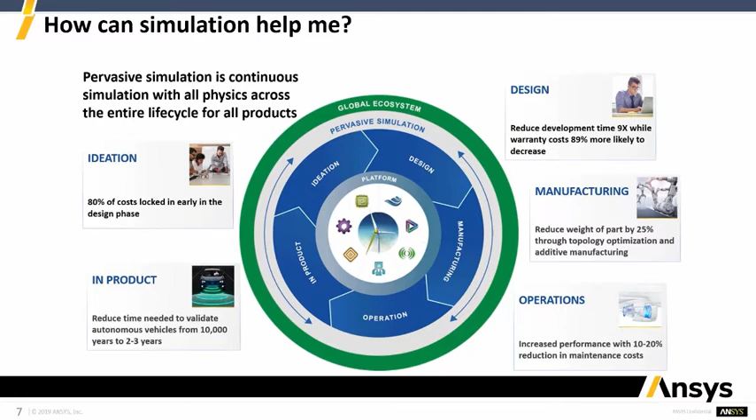So with that, I hope I've given you some useful background information on both EAC, Ansys, and what we can do. And this is where I will tag in my colleague Rod Scholl to start talking more specifically about Ansys Sherlock and what we have for you guys today. All right, terrific. Thanks, Vinny, for that introduction. Appreciate it.

It's always nice to start with a products overview slide. There's so many different products in the Ansys suite. In fact, so many that it's not even this product that we're looking at today. Sherlock isn't even populated on this slide, but it's in the electronics category, separate from structures and fluids. And of course, multi-physics is where Ansys has carved out a unique and dominant place in simulation tools.

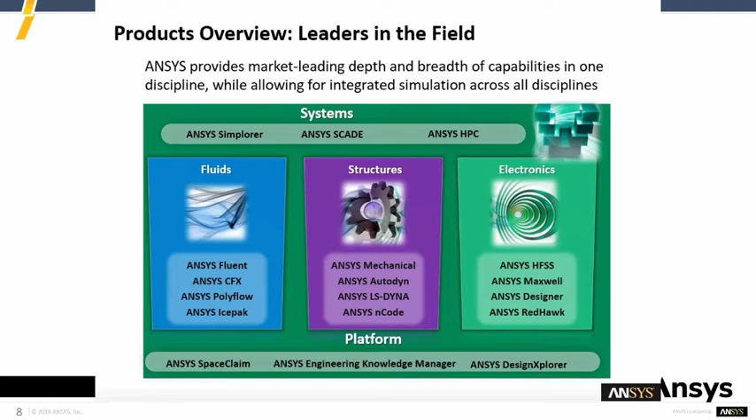So a lot of what we'll see today, we might touch on how it can be leveraged in a multi-physics environment, taking these results and bringing in or coupling them to other physics solutions. So I plan to walk through some slides on Sherlock, showing its use case, showing how it's used, a couple case studies, and then we'll boot up the software just to get a feel for the interface and what the workflow is like.

It's true with all designs that there's been a decades-long push from designing in the prototype stage to designing earlier in the design cycle, and simulation has facilitated that improvement and all the cost savings associated with it. PCB design has lagged behind to some extent, mainly due just to the expense of doing simulation, mechanical simulation and thermal simulation of printed wiring boards, just because of the many details of what it would take to get a decent simulation model.

So smeared property models were the standard for many years, and a lot of people are still either not doing analysis on their circuit cards, or they're just using a solid rectangular plate and using that to try to estimate reliability and performance under environmental loads. But it's been the cost, and essentially cost on the pre-processing side of building the models, which has slowed people down. And that's where Sherlock comes in.

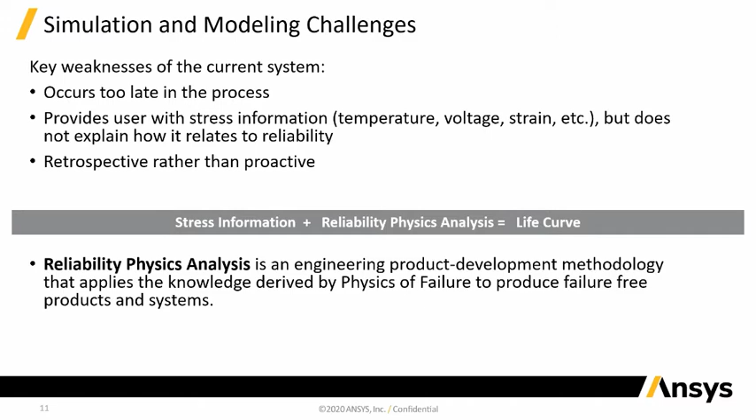And of course, what we're trying to do is eventually develop stress information, apply some reliability analysis, and come up with life prediction curves. That's the final output that one wants from a design perspective from Sherlock, is what's the percent failure over what time period for my design.

So we have enclosures, we have the printed circuit board assembly, and then combined into a system. A lot of people use Sherlock just at the printed circuit board level, but you can bring in enclosures and shells as well to have the stiffness of those components represented in the system.

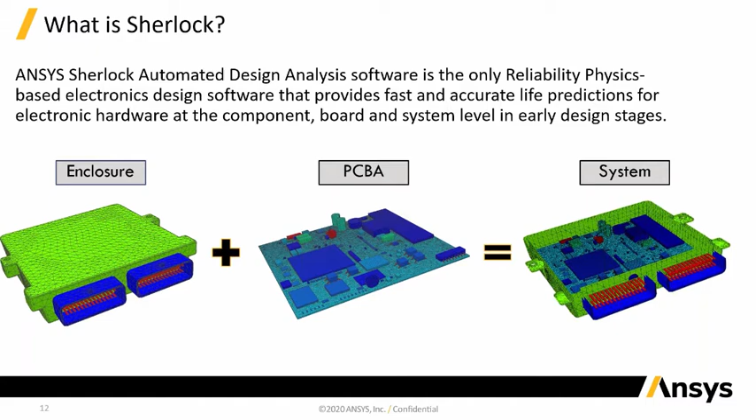This is a nice view of what I think is one of the most valuable output slides of Sherlock, and we'll take a second to appreciate it. Down here on the bottom, we have lifetime in years. Up on the top, we have probability of failure. And this gray bounding box is specified by the user for how they want a component to perform. So in this case, we want to have less than 10% probability of failure over a 10-year life.

And each of the curves represents different applied loads to the system. So the green one is plated through hole fatigue loading due to thermal cycling. The blue one is solder fatigue. Then there's vibration fatigue up in purple, and all the individual loads combined into a single overall combined risk. So you can do just a single analysis, but as you get further in the design cycle, or as your company has more well-defined environmental conditions, you can add those all in together.

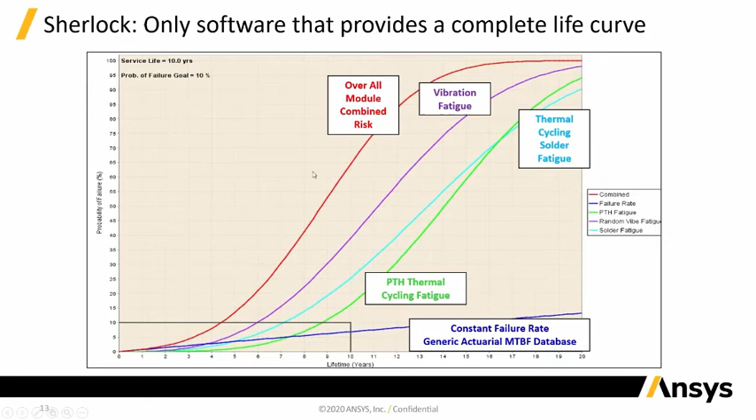So the power of Sherlock is really throughout it, but for me, I'm most impressed by its pre-processing capabilities. If you could generate this solid model quickly, then you might be able to achieve these same analyses in Ansys. It, of course, wouldn't be as automated because Ansys is more of a general tool. And by Ansys, I mean Workbench Mechanical or Classic Interface or Discovery AIM series.

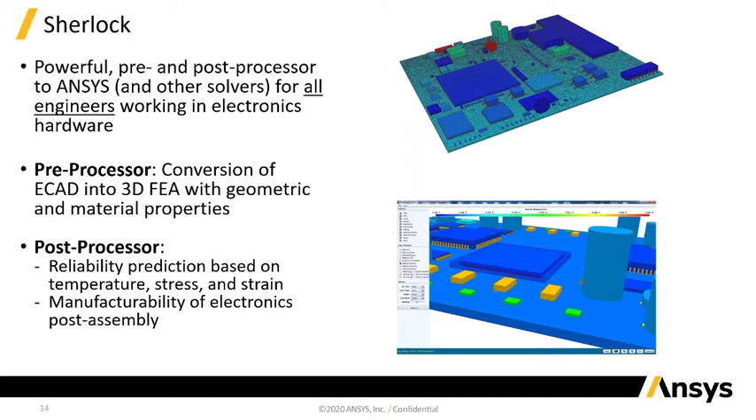But populating this image up on the right, creating that image from the information coming from electronics design, is where the expense of simulation has historically come from. And that's the pain point Sherlock set out to remove. But of course, it also automates the analysis and does report generation and easy post-processing. So all that's included in one interface.

The way this is achieved is through an extensive part library. I've heard the number 300,000 individual components, not including packages. I'm not sure the number of those, but a ton of those as well. So because the naming conventions in the electronics world are relatively standardized, Sherlock is able to read the ECAD files, the pick and place parts list or the bill of materials, and index a database to populate those components onto the board, including their placements.

You can work with your own library if something is missing. You can keep a local library of components, but it's pretty surprising how successful just the first import is. Of course, you have to go through each part and make sure it's what you want, because some of the entries are labeled as guess, for example. So it recognizes the package or the package thickness. It's using a default ratio. If you have that information for a component you use a lot, you might switch it from guess to the actual thickness. And the origin of all the data is tracked here and color coded off to the right.

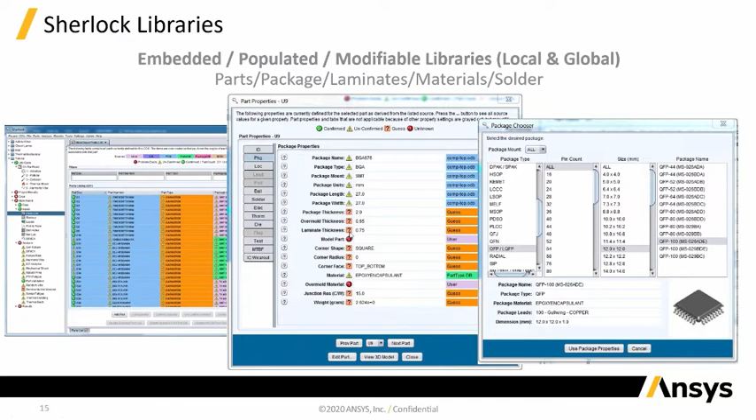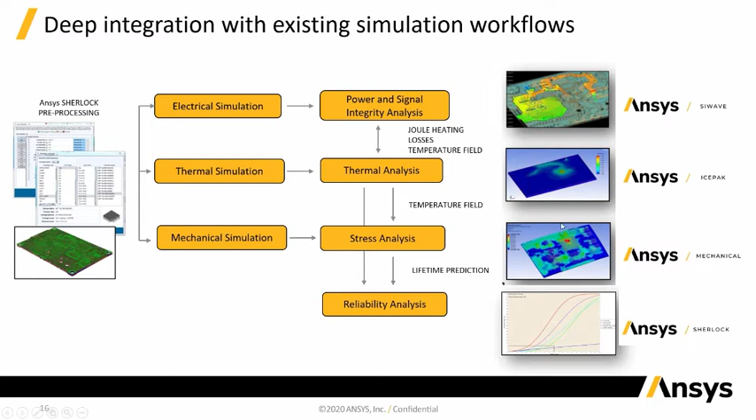This one takes a minute to stare at, but I think it's worth, again, just seeing where the tool would be used in your design process. You're going to start here with the input data after the electronic design is first done. It's going to parse through the Sherlock library to create a design and analysis. So bring that over into pre-processing. You can include life cycle conditions.

If you wanted to, you can bring it over to the Ansys suite and do more complex thermal, vibrational, and shock analyses, nonlinear analyses, or anything that's particular to your design. And of course, you can bring things back in on post-processing from any of these complex analyses, bring in the strains and the displacements, temperatures, and use the Sherlock reliability physics for reliability predictions.

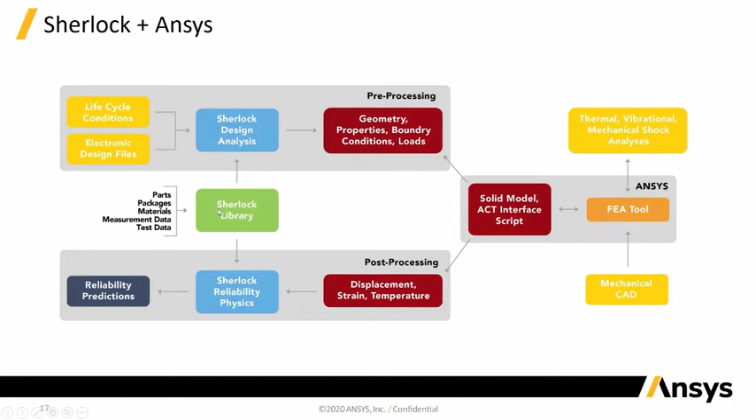So when it comes to reliability for solder models and other electronic joints, there's been a slow-moving technological history of how to calculate that. And it starts back around Steinberg, I think that's in the 50s, and Darveaux models into Engelmaier. And Engelmaier was sort of the latest and greatest, which uses a strain range, so Coffin-Manson type fatigue curves and an allowable strain for each of the locations on the board.

Blattau, if I'm saying that right, switched that over to a strain energy method, and that's what Sherlock uses. So there's some papers showing how successful that has been, but the point is it's using the latest technology to take the predicted strains at all these board locations and come up with predicted fatigue lives for all these different types of connections. So that's a little bit of theory going on behind the scenes. Obviously, if you want to dig into that and that's important to you, we can have a more technical discussion.

So we see how it fits into our design process, but what exactly can it do is the question. So solder fatigue at the board level or system level, it can predict natural frequencies. You can apply mechanical shocks, random vibration, your PSD, harmonic vibration, doing the plated through hole fatigues. CAF is like a migrating, substrate materials like copper migrating during an electric field, a sort of advanced analysis, but it's been implemented. Heat sink modeling, wear outs of capacitors, especially if you have that data, of course, from the manufacturer.

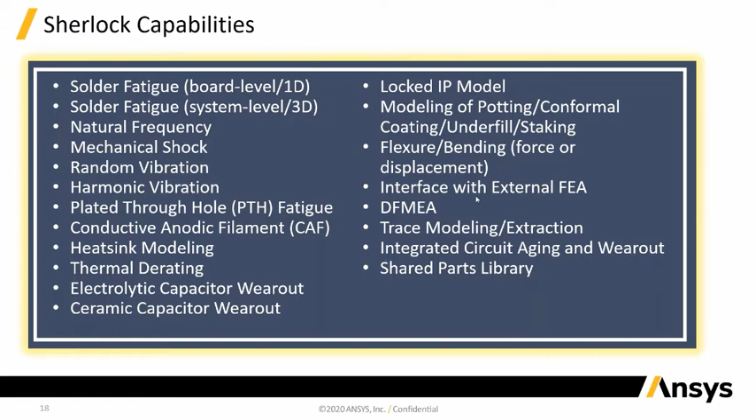So when to use it within the design process, you start with your hardware specs from the customer, build a functional block and have to make decisions on the housing and the connectors, come up with an actual board. The more you use Sherlock, the more it'll be involved in your initial part selection, because its parts library will show you the different types of attachments and joints. You'll begin to get a feel for which parts have superior fatigue lives the more you work with them. And then, of course, initial part placement.

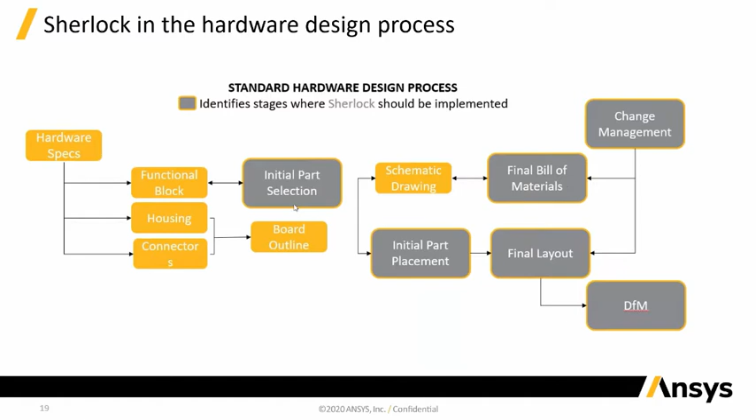In a typical design process, you get one or two guesses at that. And Sherlock makes it so you get many guesses quite inexpensively. And of course, part placement is huge for any of the mechanical shocks or vibration cases. It can also matter for thermal as well if you have some high temperature chips. And then developing a final layout, producing the bill of materials. There's a brief slide on the locked IP model. If that's of interest to you, we can give more details to you of what can be hidden and what those input outputs look like.

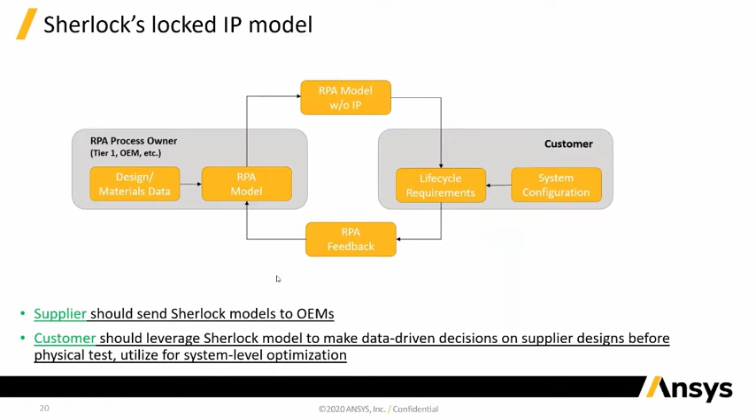So many times, this might be redundant at this point, but I still like the slide. I always think of electrical circuit design, and since I'm a mechanical engineer, I think of that as somebody else's territory and somebody else's problem. Once in a while, when we have to include it, as we mentioned before, I've used smeared properties on a rectangular board and not really know the actual stiffening effects of the installed components. But that's no longer the case with Sherlock. If you're in charge of the mechanical reliability or electronic reliability of the product, I think Sherlock is the tool that you would use.

If you're involved in the testing, a lot of the cost savings that we see are done on the test side, scrap rates, the cost of building tests. If you can show some tests aren't marginal, then you don't even have to perform them. You don't have to build certain fixtures. People can save millions just on the testing side.

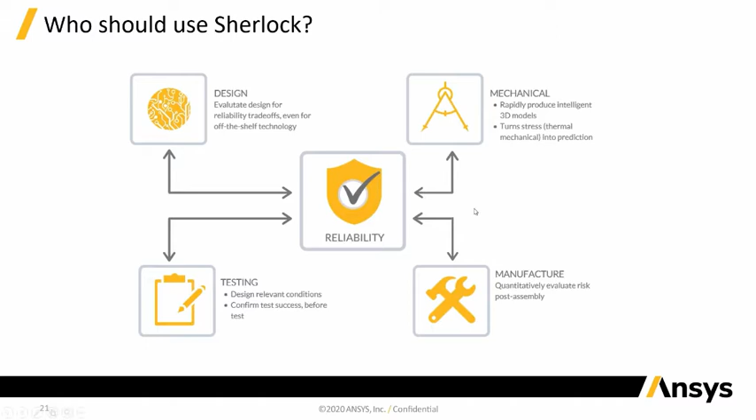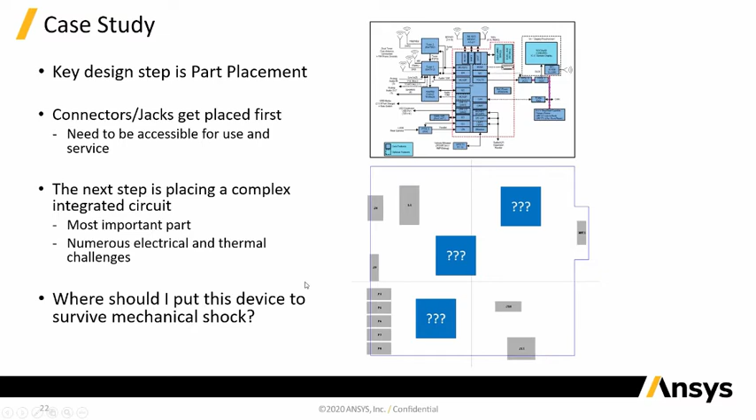So if you're new to electronic board design, I mentioned already how part placement is important, and it's sort of a competing issue between the traces and the power generation, heat dissipation, and then the mechanical requirements. Generally trying to avoid placing things in the very center of the board, which is often the flexure points, unless you have some posts located there. But for surviving mechanical shock, where should we place the IC chips?

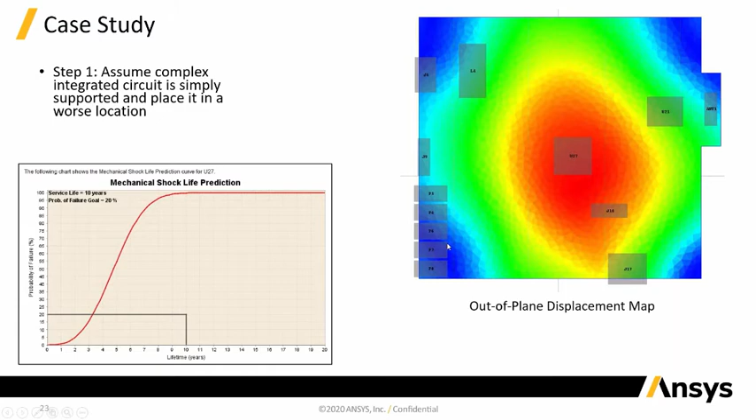By sliding the chip to the left to another location on the board, you can see dramatic improvement in the life of the product. Similarly, on this one, they've changed the support locations, changing the profile of the displacement and leaving U27 in its original place, and that has an even better effect on improving life. So in this case, they also changed the potting underneath U27.

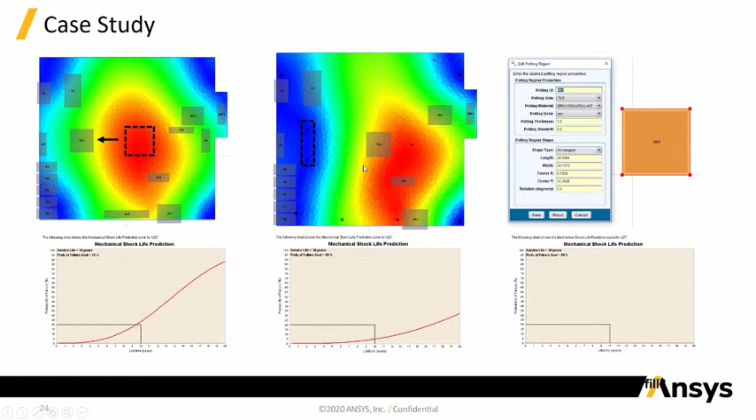So the build times, as I said from the beginning, changed from 2 weeks to 45 minutes. I think your first time through it might take 2 or 3 hours because of familiarity with your individual components. But as you become more familiar, I think 45 minutes is too long. It just doesn't take that long to import models that come in right away. And you just have to review, depending on how many chips or components are on your board. It always makes sense to review them to familiarize yourself with them.

So this is a nice tool to combine with your Icepak and your SIwave for your mechanical, because it does that pre-processing for you. And in the end, we're saving costs by reducing warranty returns in the field. If this tool interests you and we have to justify the cost of maintenance and purchase, looking at warranty costs on returns from electronic failures, those add up very quickly. So it's an easy place to sometimes find the ROI, as well as testing costs, which I already mentioned.

And then just in terms of design cycle improvement, it takes the design process from months down to weeks or even days if it looks good out of the box. It can verify that. And sometimes time to market is what's most important in electronic fields these days.

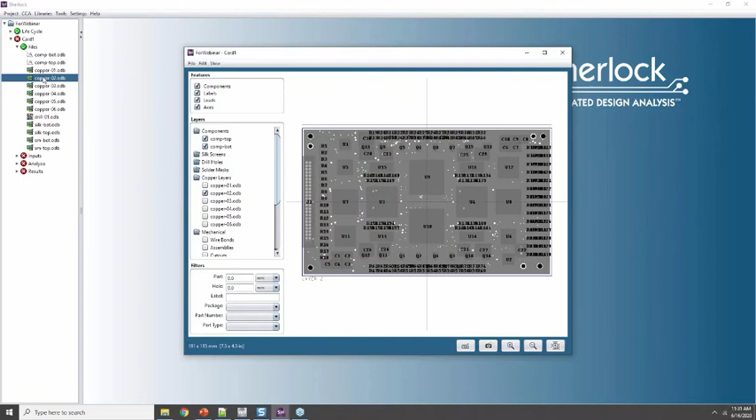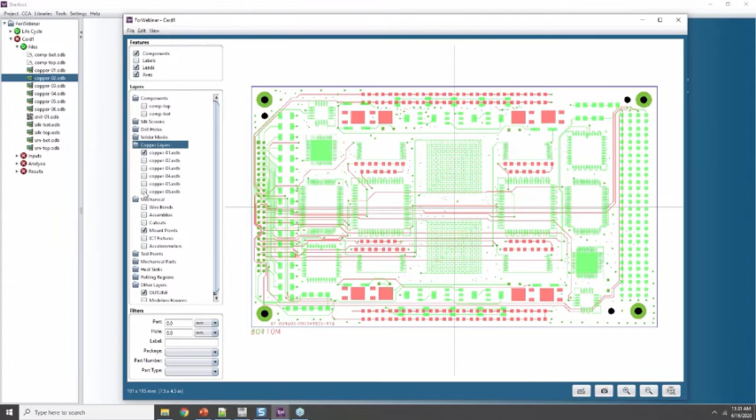So on the input files, one of the nice things to do is let's just look at a copper layer. So I've double clicked it to bring up the layer viewer, and I'm going to toggle off some components, and we can see the copper trace that was present in the ECAD. And actually we can see all of them if we want. Remove the power ones there, but top and bottom, and we'll just look at the top for now. So here's the top copper layer and traces that are present.

Now let's come down here to inputs where all these files have been brought in. Let's look at the stack up. What the stack up has done is gone through those individual layers and laminates and come up with aggregate material properties automatically. It's assessed the volume of copper, and it's adjusted the CTEs automatically and the densities. So this essentially composite material now has 11 layers in it with the different copper contents and laminate contents. And of course, if you wanted to adjust these for a particular design, you could as an improvement or as a design change.

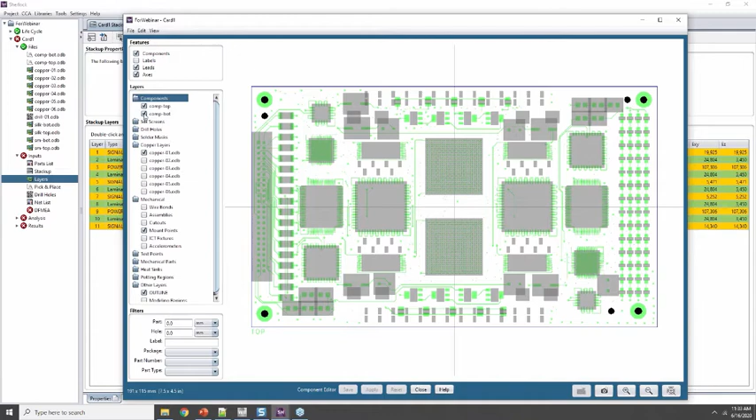If we go to the layers, go back as well. You probably won't do much editing here in this. You might do editing on the ECAD side, but the kind of editing you might do would be to change part location or orientation. So if I go to edit components, get rid of the bottom, and I can even get rid of the copper. We'll turn off the labels just for fun. And so I can pretty easily move things around on the board. Obviously, there's no room for this one. So let's cancel that.

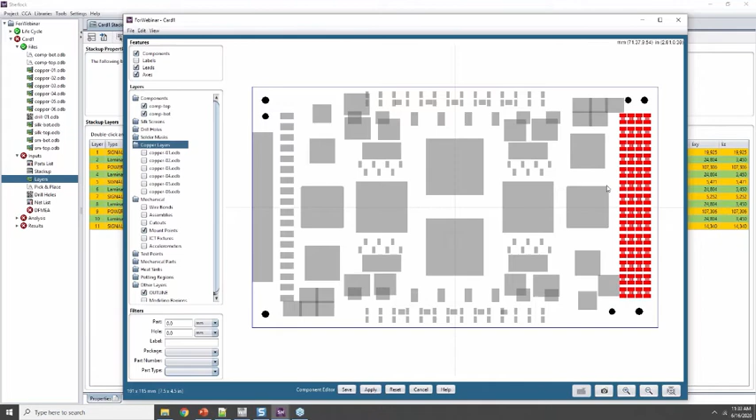But if I want to rotate a bunch of resistors, oh, missed. Resistors sometimes don't come in with the correct orientations. Most things come in with the right orientations, but there's an inconsistency within the standard for them. We can see I can move through holes around, the mount points around if we wanted to, or change their size. But you can see it's pretty easy to make minor changes on this board to do design changes. I think at that point you would then send it back to ECAD and they could update the traces for the design that you determined would have acceptable reliability.

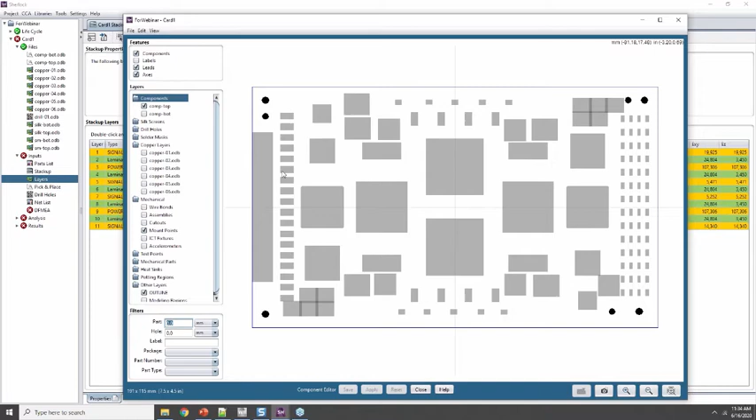Now the other big component here, we've talked about the board coming in and the component positions. Let's talk about the components themselves. And so I've gone over here to parts list. This is not that big of a board. This is a couple hundred, maybe 100 components on it. The color coding here is important. It tells you the origin of the information, where it's brought it in from the ECAD files, and a lot of them are orange and are therefore a guess. The package DB file brought in some of the package names, part numbers came in probably from the bill of materials.

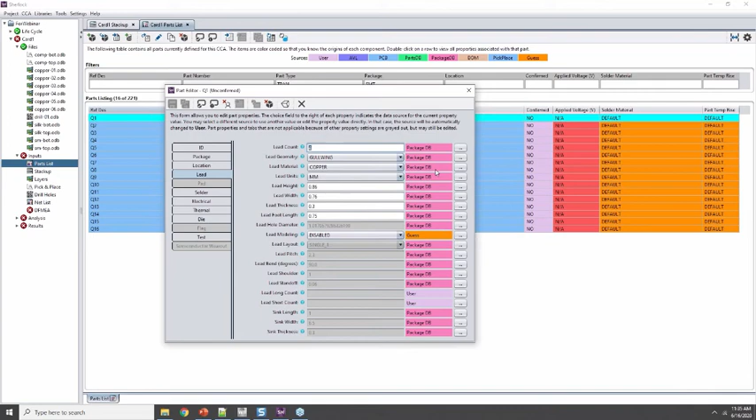This parts list you're going to spend some time working with, and so it has some features, such as filters, and you can edit properties within it. You can edit individual properties. For example, you might come in and change the solder material. You might change the solder thickness. Of course, you could manually edit location if you wanted to. The definition of the leads, the different lead geometries that come standard, those were defined in the package DB. And there's also the ability to modify multiple parts together so that it's not a manual process. So just want to point out, you have a fully featured interface to work with your parts individually and edit them and make changes as required.

Now this parts list, I'm going to right click here and go to update parts list from part library. Now you have a local library and the Sherlock library. So I'll just use part numbers here. This is going out to the Sherlock library, the 300,000 plus components, which is being updated with different manufacturers and data. And you can see a lot of these fields have turned green, meaning that it has found those components and populated more information within each individual component.

So that's the creation of the components. And first time through, you might just click solve without even messing with the parts list, just to see what you're working with. And as you work with the model, you would add accuracy. So you have component definition, you have the board layer definitions, and their placement.

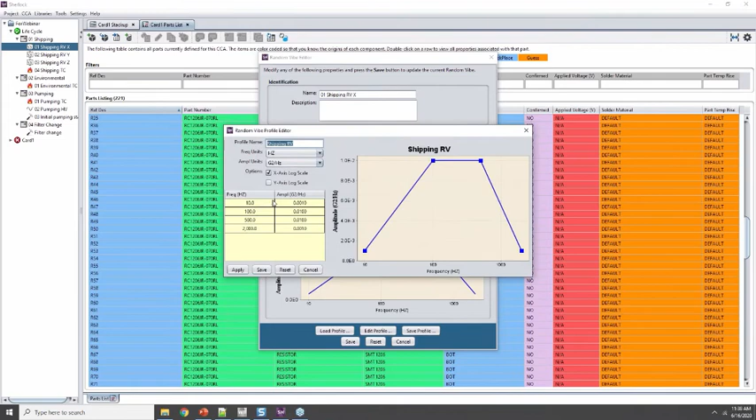So within the shipping load, we have an XYZ direction. You can see this is PSD, this is random vibration in G squared per hertz, and comes in with a file. You can edit this profile, tabular edits, temperature, operating temperatures, uniform operating temperatures, the environment cycles going up and down. This has only one load case in it, but you might have multiple starts and stops and long dwells.

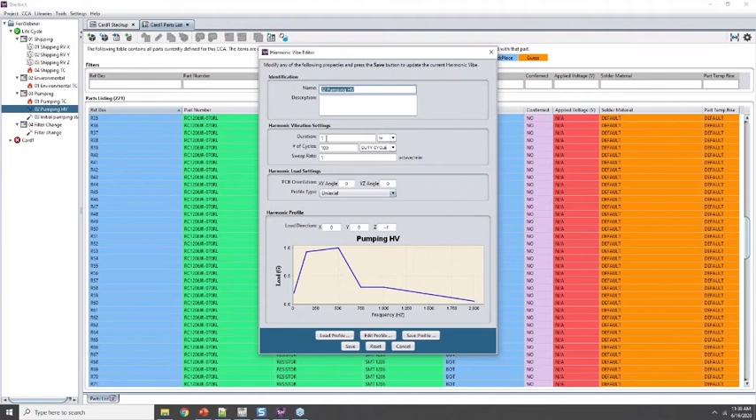Pumping, this was on a mechanical part that actually had a known G loading profile. So essentially a shock profile, and this one's going to repeat, 100 cycles per hour. So this is where you would put in duty cycles, mechanical duty cycles. Now you might have some shocks. I guess there aren't any shocks defined here as well. This filter change looks like it is a time history transient. So you can see the options for editing those individual environmental events.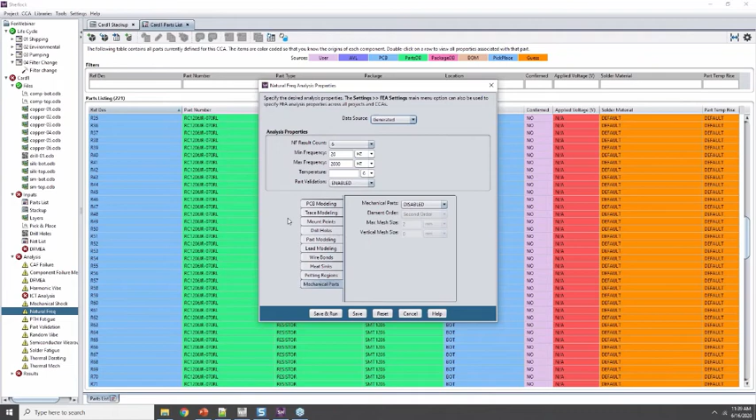So with those defined, we have the board and we have the inputs. Let's show you what the analysis looks like and how quick it is. The longest one is natural frequency. So I'm going to kick it off now and say edit properties. It brings up some questions like how many modes do I want over what frequency range. I'm just going to accept everything and say save and run. You can see this little clock going down here.

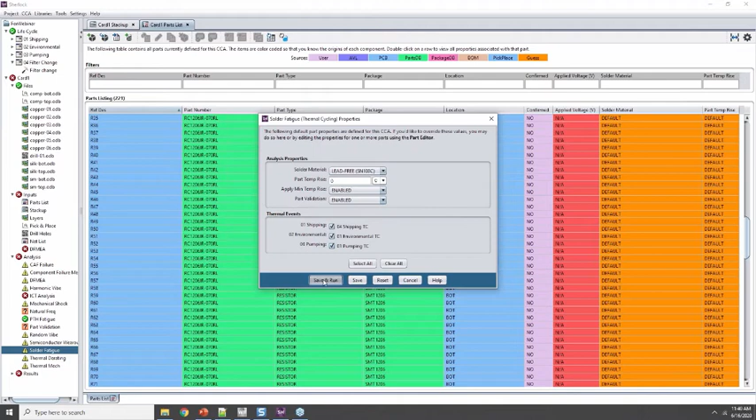We'll do some plated through-hole fatigue. Let's add all three environmental loads. We'll run fatigue on that. And let's do solder fatigue. And right now it's using this, let's use SN100C, and we'll run all three conditions. So plated through-hole fatigue is done. Actually, it looks like the others are done as well.

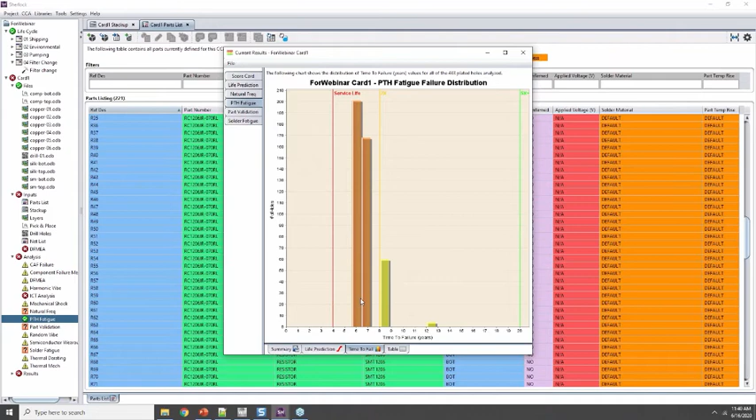If we look at the results, we have all sorts of problems with plated through-hole fatigue. Everything is red. If we go to life prediction, we are not meeting life. Time to fail, we can see there's quite a few components, or sorry, holes, because it's the plated through hole. Quite a few holes which are failing the fatigue criteria. And in a tabular view, we can look and see which of those are the worst.

In this particular analysis, I just did this earlier, so I know this is all coming from the pumping, I believe. So if we turn that off, now we can see, oh, the life isn't much better, but all the components are passing the plated through-hole requirements, but it's still marginal, or still yellow. All right, so greater than 40 years, so that's enough.

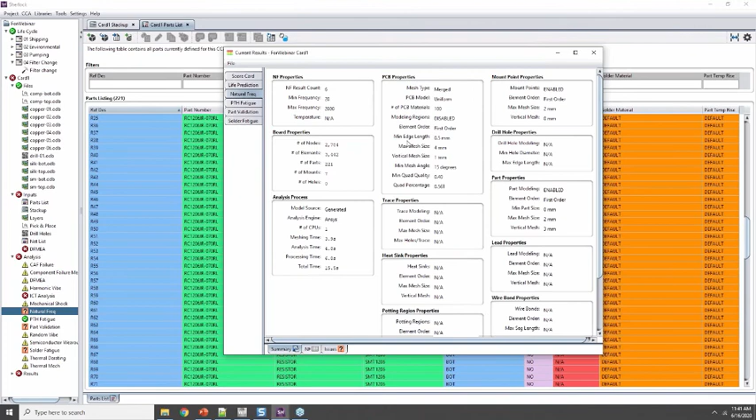Let's look at the natural frequencies. There's a summary. If we want to actually view the natural frequencies, this pulls up a viewer, so there's a second for this license to check out. Now, when we submitted the natural frequency analysis, by default, it's submitting an Ansys job in the background. So it's created the file, it's run Ansys, it's solved it, it's brought those results back in. So you can match Sherlock to different solvers, but in this case, we're using Ansys.

And right now we can look at the individual mode shapes on the board. It's nice to see the parts populated on there as well.

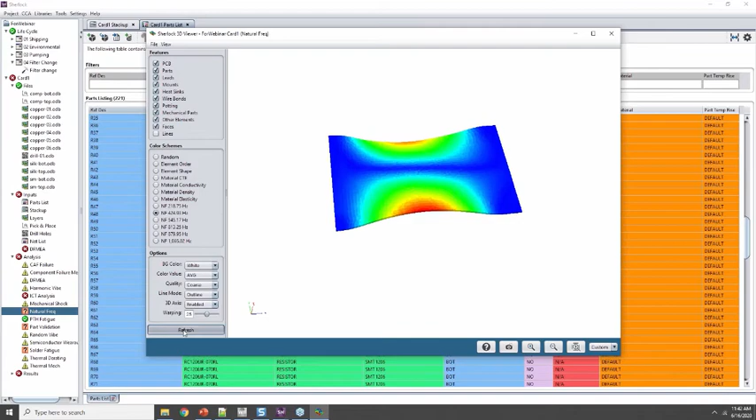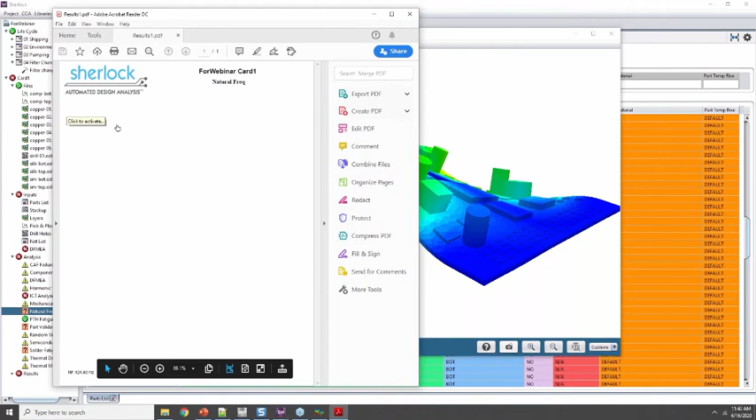For visualizing where components might need to move and where high strains are. You can export these types of results into PDF, for example, for sharing with the team. This is just kind of a nice feature of PDF that you can now rotate PDF, have dynamic, oops, that's not that one. So if you want to share information easily, PDF is a nice way to do it.

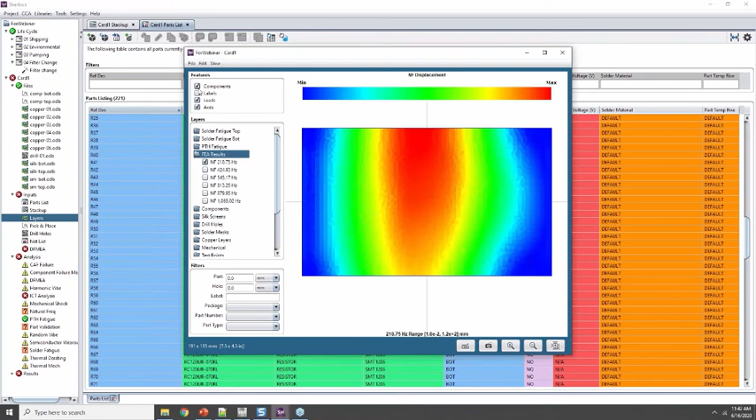So although these are nice 3D pictures, it's worth showing that within our layers tool, because I've done this analysis, the FEA results are in there as well. And let me add in the components. And so that's maybe it. You know, the 3D view is nice, but this maybe is more typical usage to see how your deflections map onto your individual components.

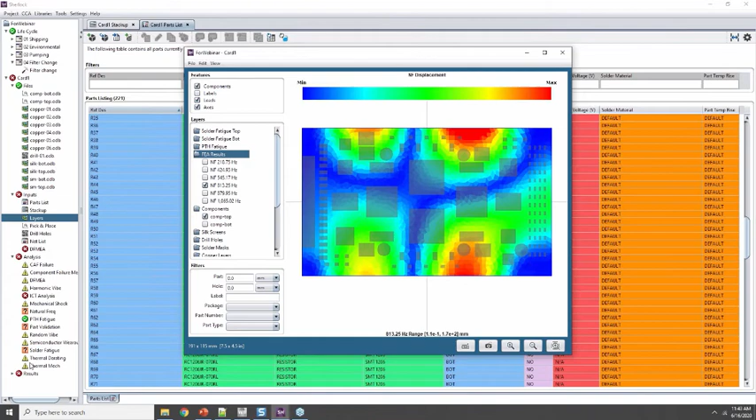Let's go down to solder fatigue again and view those results. So solder fatigue did not match currently. If we look at the table, what are we looking at? A lot of these have a life of around 3 years. U1 and U2 seem to be the worst. So a typical design process might be, you probably have to change a bunch of them. So maybe you would select U1, U2, and all these resistors.

Go back to your parts list. And for U1, U2, we would change perhaps the solder to a defined higher grade material. And then we can go back and rerun the analysis. So it's using the same defaults for everything else, but since we've specified the solder material for U1 and U2, now we can see U1 and U2 have increased their life. They're up to 9.43 years just by changing the solder material.

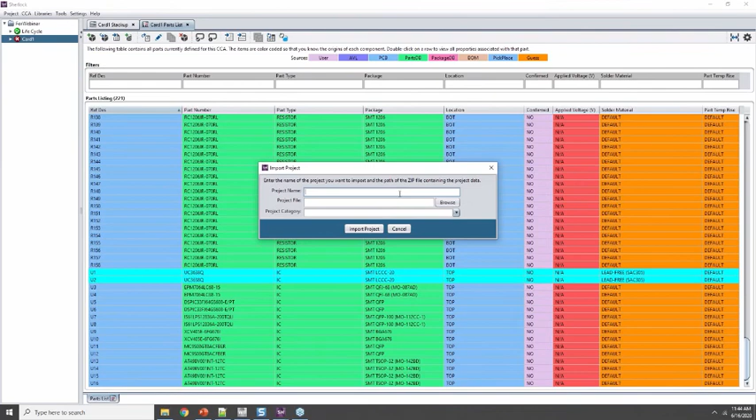It might be worth it to go back and change the solder material for these resistors, or obviously there's a lot of other design changes one could make. So that's what I wanted to show you there. Let me import a fully solved project here

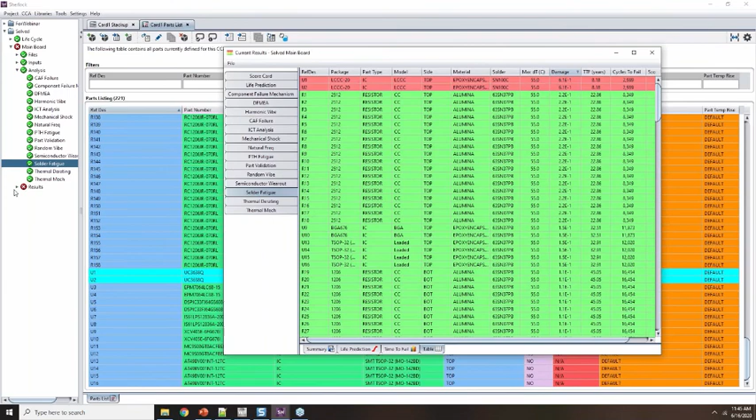and talk about project reporting, because that's sometimes the least pleasant part of our jobs is making the report. You'll notice this analysis has green check marks. They've done every type of analysis on this particular component. So under report, we can generate a CCA report, tell it what we want to see, and I'm going to say everything. This will take a minute to pull up.

But in terms of cost savings, a lot of times it's not even cost savings in documentation because people just don't document because it's too difficult. So it's not just a cost savings in this case. I'm gonna have that opened up. I thought I had that closed. Here's the report.

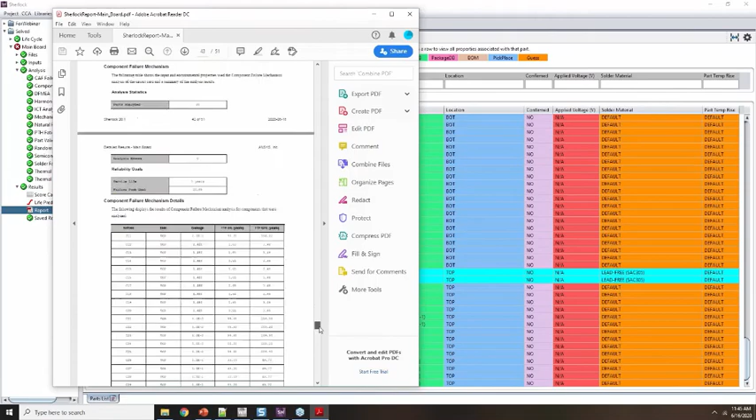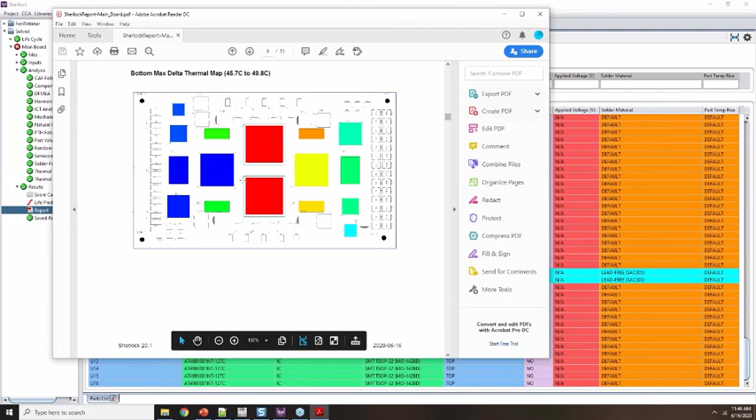And this automation saves countless hours and allows a report where we can add in a few paragraphs later to describe observations, conclusions, and desired changes. So this type of analysis, turnkey type of analysis, really lends itself to report writing. And so this is a terrific feature.

So everything we've talked about so far shows life cycles and inputs of just environmental temperatures and shocks. But one of the big things that we become concerned with on some boards is thermal profiles during operation. You can go through and assign temperatures to individual components, but many times that isn't known. One way to do this is to add a thermal image file.

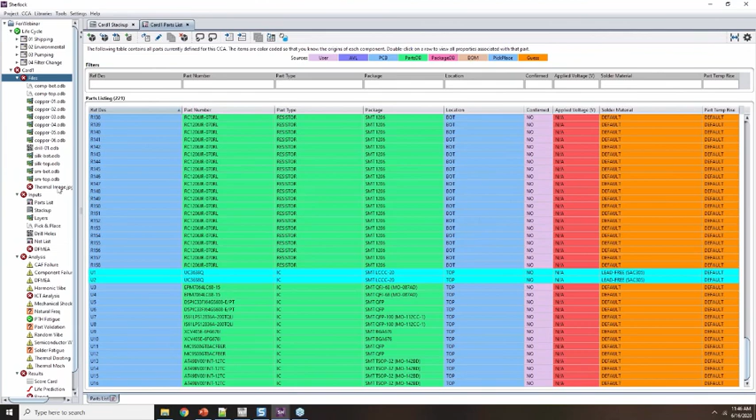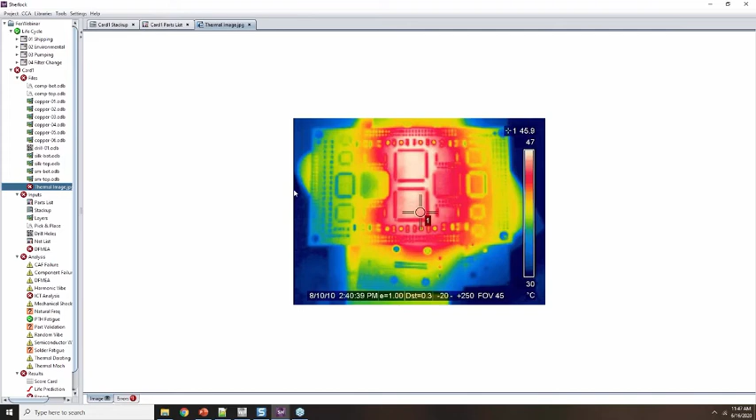So I'm importing a thermal image. Let's view the file. This was done with a thermal camera on this particular board, which we can now use that thermal image as an input. So this is a thermal map as an image. Let's move out of the way. Minimum temperature is 30, maximum is 47.

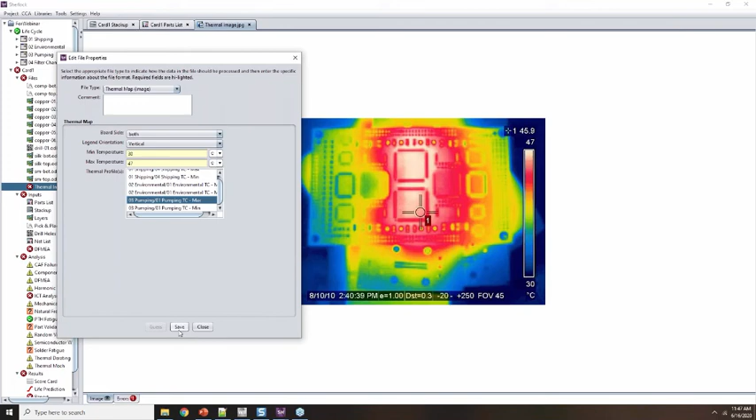So I'm doing this with a thermal camera image, but you can imagine you could do this with an FEA image from a supplier, or you can of course read thermal results from an Ansys tool. But if you didn't have that and all you had was an FEA report, you can still import those results.

And now for the mapping, we actually have to map the board. Just kind of fun to do. Oops. So you tell it where the board is at. And then the contour scale. Align the legend. And so with that being saved, let's go back to our layers image. Get rid of that. Oops. And apply a thermal map.

So whether it comes from an FEA analysis or a thermal camera, you can see how this is quite valuable for maybe moving or seeing what components are being most affected by the temperatures. The last thing I want to show you, don't have a ton of time left, is as we've used it as a preprocessor.

We've stayed within Sherlock this entire time to do our evaluations, but sometimes people just use Sherlock solely as a preprocessor. And that is where you can go down to analysis, for example, and go to, let's say, natural frequency and export FEA model. And there's different formats right now. I've had it selected to a WBJN, it's a journal file for a Workbench.

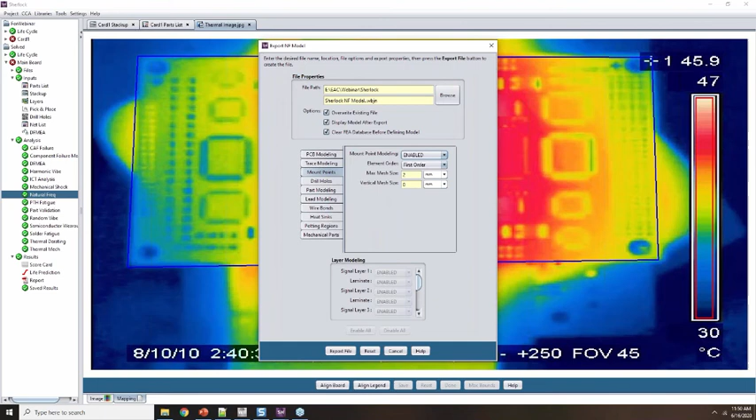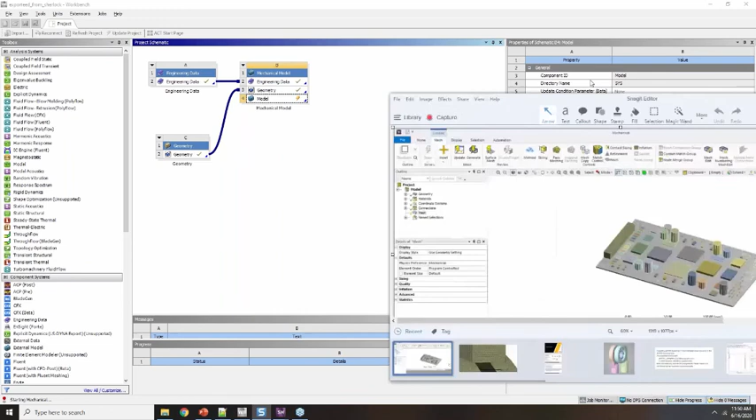And then click export, and you can control everything that you want exported, whether or not to include the drill holes. It takes about 3-4 minutes to do so, so I did that in advance. Brings up this Workbench model. So all I did was click export, and it launched Workbench, ran that journal file, and created the associated geometry. While that's pulling up, I have an image of what it pulled up. So you can begin working with this as a normal mechanical file at that point.

So that's a lot of the capability. There's of course many that we haven't touched on. This isn't really meant to be a demo, but as an introduction to the tool, if this seems like something you might be able to use in the design process, we look forward to a chance of having a conversation to know how you might use it. And then from there, we can build an actual demo to show you the capabilities which apply in your particular situation.